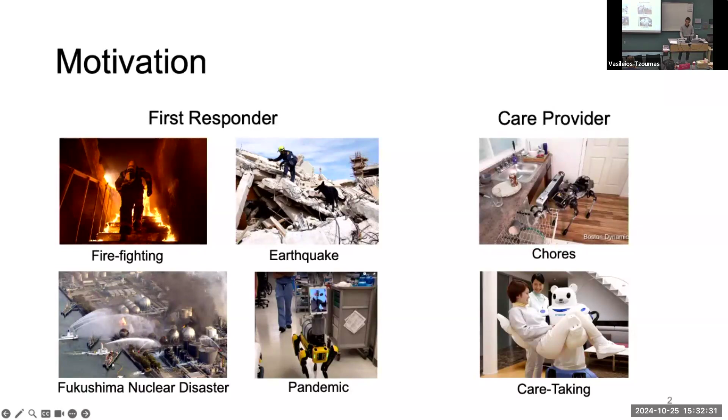Let's first take a look at search and rescue scenarios, where legged robots have a special capability to make discrete contact with the environment. In the first project I'm going to present, it's about jump planning over rough terrain. Imagine a collapsed building after an earthquake—if we can send in a legged robot that can make a sequence of jumps to overcome rough terrain, we can do search and rescue to identify survivors.

The planning problem has a couple of challenges. One is that the robot has to reason about discrete decisions, because the terrain presented to it is not smooth—it has multiple patches it can make contact with, so it has to reason about at which time to be in contact with which patch of terrain. The second challenge is that it has to do continuous time optimization, because the system undergoes very agile, highly dynamic motions. It has to explicitly reason about its capability limits as well as the complexity imposed by the environment.

So the first project is about jump motion planning in unstructured terrain, specifically using mixed integer convex optimization. The problem is set up as follows: our goal is to enable the robot to come up with a motion plan that leads it from the starting position to the goal region through a sequence of jumps.

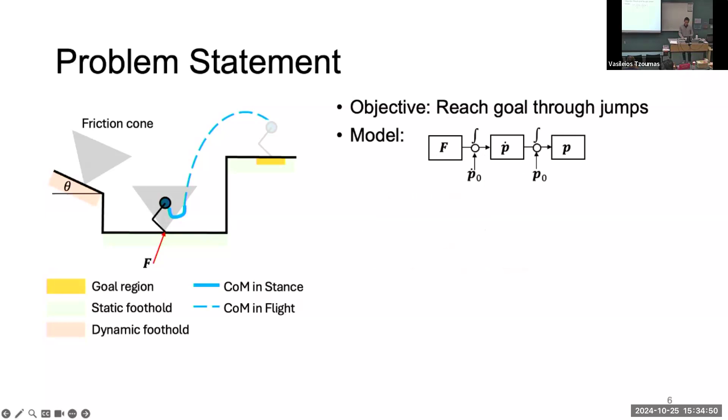Given a ground reaction force profile, we can integrate twice to obtain a trajectory of center of mass velocity as well as its position. However, the difficulty lies in its constraints. The first constraint, the friction cone constraint, is quite benign, because in order to ensure the foot does not slip with respect to the ground, the reaction force should lie within this cone.

But luckily, this constraint is linear in nature and doesn't break the convexity of the problem.

The problem comes in when we want to introduce the torque limit constraint. This is a non-convex constraint because even with the massless leg assumption, the torque equals the Jacobian transpose times the force, which is the ground reaction force.

And the Jacobian matrix involves sine and cosine functions and breaks the convexity. The second source of non-convexity comes from the bilinear constraints in the flight phase kinematics. If we take a look at the jump, the robot will undergo an aerial phase.

The takeoff velocity P dot TO and the aerial time T air are both decision variables, and this equality constraint is bilinear. And of course, even with the simplified terrain assumption, the choice of foothold is in nature discretized, so we have to introduce mixed integer constraints into the mix.

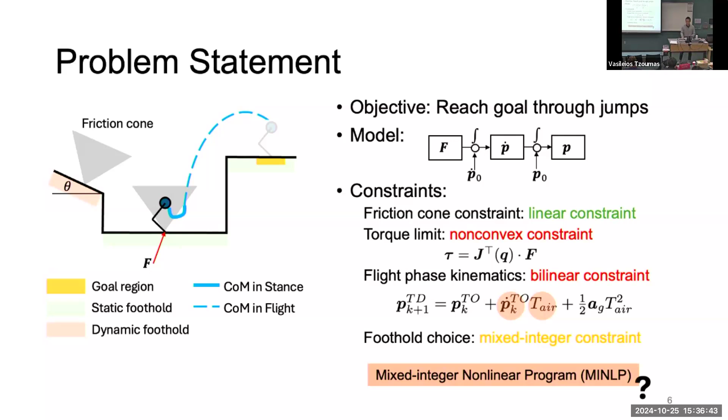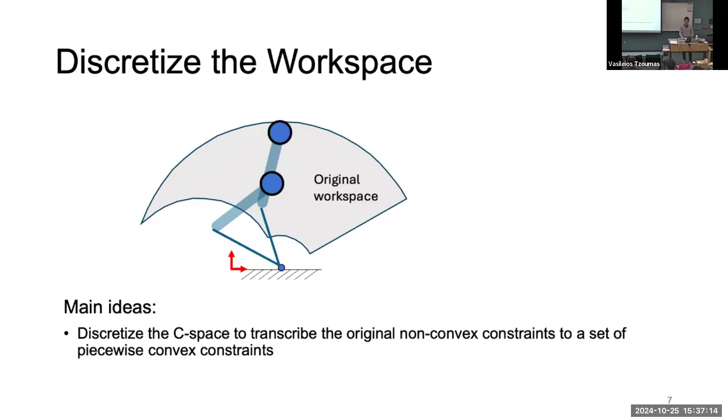So the main idea to make this MINLP convex is first starting with discretizing the workspace, or the configuration space of the robot, the C space. The reasoning is because the torque limit constraint is conditioned only on the pose of the robot. And if we can discretize the C space, then we can transcribe the original non-convex constraint into a set of mixed integer or piecewise convex constraints.

So the first thing we do is discretize the C space into a collection of convex polytopes. Then we introduce binary variables to act as switches to activate or deactivate the piecewise convex constraint associated with a specific polytope.

Specifically, we assign a binary variable indexed by S and T for each polytope omega S at time T, where if the binary variable B_ST takes the value of 1, that means at time T, the center of mass position P is in polytope omega S.

And whenever that happens, the associated convex constraint with that polytope will be activated, and all the other constraints will be deactivated. So B here is a binary variable.

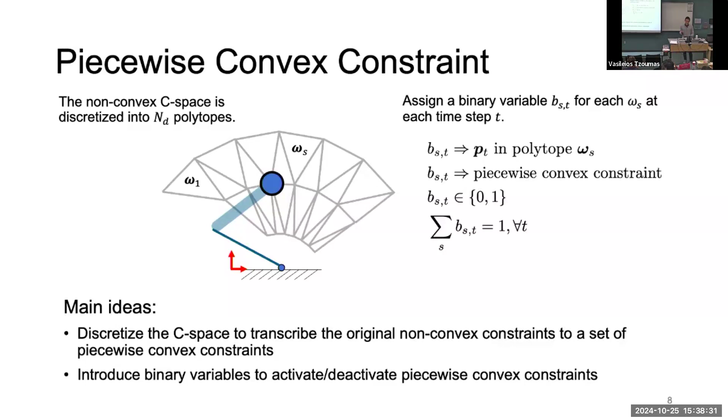And if we add the additional equality constraint where the summation of the binary variable along the axis of S is equal to exactly 1, then we can make sure that only one polytope is activated, meaning that at any given time T, the center of mass of the robot will occupy exactly one polytope.

So here, the implies operator, which is this right arrow, is implemented using the Big-M formulation.

All right, so this is the setup. We have discretized the workspace and introduced the binary variables in hoping that we can transcribe the MINLP into a mixed integer convex program.

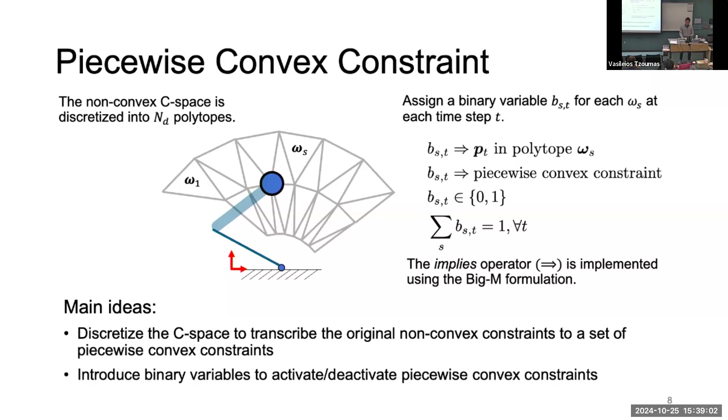So now, how can we obtain a convex relaxation of the non-convex constraint associated with torque for a specific polytope? Let's take a look at this torque limit constraint.

So for each polytope, the torque limit constraint can be written down as follows, where the 2-norm of the torque vector tau should be less than or equal to tau max, where the torque vector is a 2x1 vector with the hip and knee torque.

And the torque is the Jacobian matrix transpose times F, where F is the ground reaction force. And the joint angle Q can be calculated from the center of mass position via inverse kinematics.

So we can call this torque limit constraint star, and by plugging the third equation into the second and the second into the first, we can rewrite the torque limit constraint as follows: the 2-norm of J transpose F squared is less than tau max squared. And if we write it in quadratic form, the torque limit constraint is a quadratic inequality constraint.

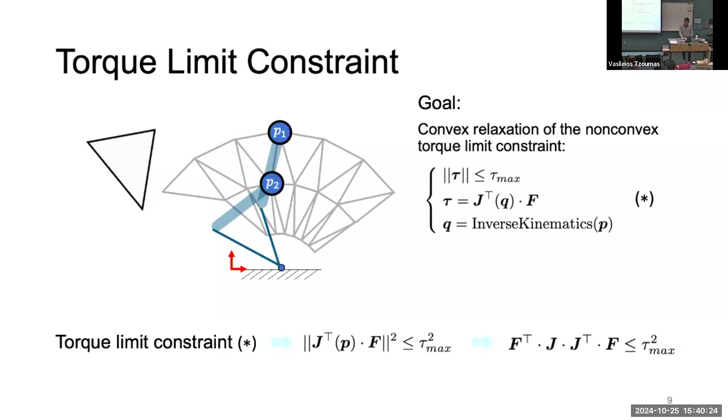So let's take a closer look at one specific polytope. Our goal is to obtain a convex relaxation of the non-convex torque limit constraint for all the points within this polytope. A very natural idea is that at least we need to satisfy this at the 3 vertices, right?

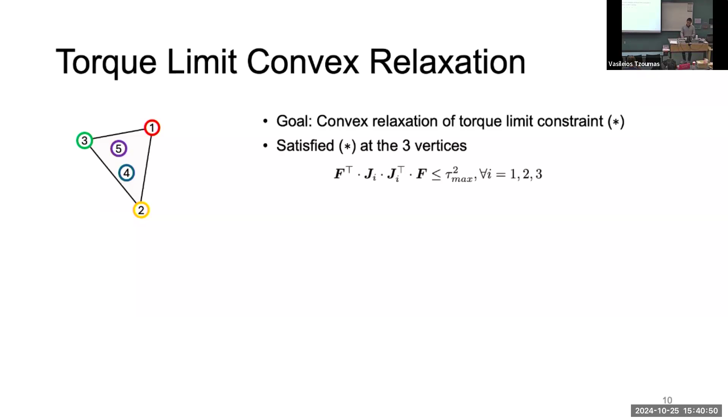So we can write down this set of 3 inequality constraints by plugging in the associated Jacobian matrix Ji into the inequality constraint. Here we observe that the matrix J times J transpose corresponds to an ellipsoid epsilon i in the joint torque space.

So if we draw the torque ellipsoids in the joint torque space, for each of the vertices we can see that we have 3 ellipsoids. And what this inequality constraint says is that all 3 ellipsoids should be lying within this circle with radius tau max.

So now the question is, how do we generalize from these 3 vertices into all points within this polytope? Because if this is a finite sample, how do we make sure that we can satisfy this constraint for all the points? One idea is to simply take more samples within this polytope, so we can take points 4, 5, and so on, and add them to the list, but it's not exhaustive, right?

So how do we make sure that we generalize? We propose to use a convex relaxation where we impose the torque limit constraint on the minimum volume ellipsoid that covers the union of ellipsoids. So if we can find an ellipsoid that covers all sampled ellipsoids, and instead of imposing on each sampled ellipsoid we impose the torque limit on this overestimation of ellipsoids, then we can make sure that the torque limit constraint is guaranteed within this polytope.

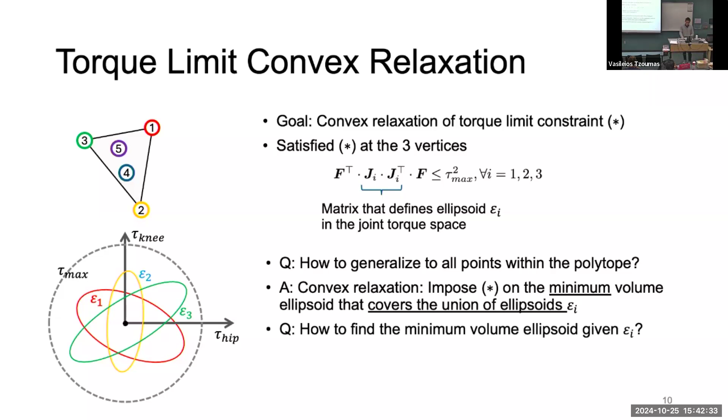So now the question becomes how to find the minimum volume ellipsoid given the set of sampled ellipsoids. It turns out we can use the Löwner-John ellipsoid, which can be obtained by solving a semi-definite program, or SDP.

So in this SDP, the decision variable is X, a 2x2 symmetric positive definite matrix corresponding to the ellipsoid of interest, which is the blue ellipsoid on the lower left corner. We want the minimum volume of this ellipsoid, so we want to minimize the trace of this matrix, and then we want the ellipsoid to cover all the sampled ellipsoids.

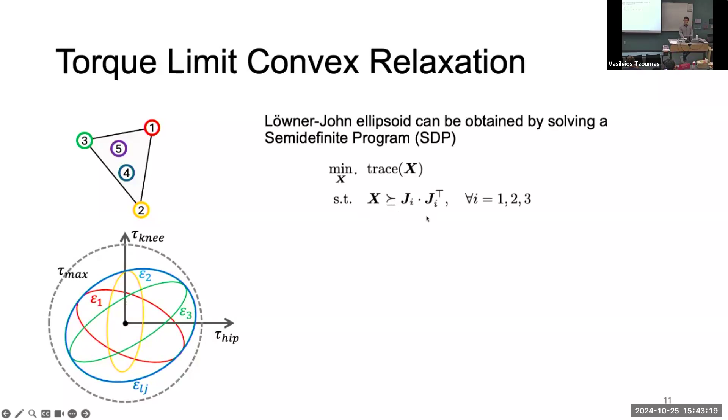So we need to make sure that X is greater than or equal to Ji times Ji transpose for all the sampled ellipsoids. This SDP can be solved using solvers, and each Jacobian is the Jacobian matrix at the vertex points.

So we can solve the SDP to obtain the X matrices. And instead of imposing the torque limit on the sampled points, we impose it on this overestimation of the torque mapping. At this point, we have transcribed the original non-convex constraint into a mixed integer quadratic constraint. Any questions up to this point?

This Löwner-John ellipsoid semi-definite program only involves the torque ellipsoid at the 3 vertices, right? Yes. And you know that all the other ellipsoids are within it.

Yeah, so this is a very good point. It depends on whether this assumption holds, which depends on how you discretize the space. We know that binary variables are quite expensive, so we want to minimize the number of sections, but we want to make sure the sections are small enough that this holds. So it's like a trial and error process to figure out what the hyperparameter is.

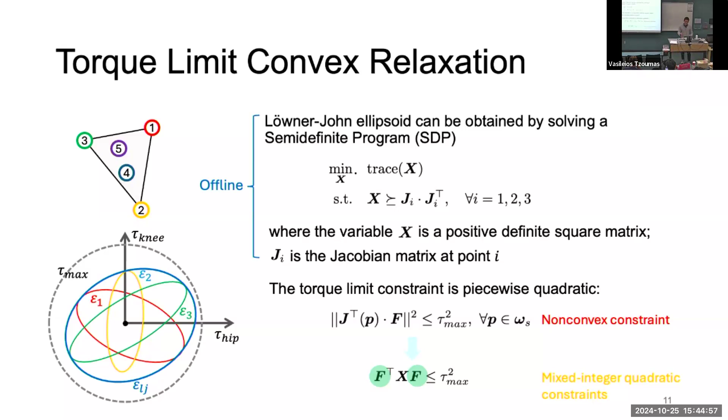Okay, so solving this SDP is computationally expensive, but the good news is that it can be done offline. So we can construct this C-space discretization, solve a bunch of SDPs for each ellipsoid, and then retrieve those X matrices online for the planning.

Okay, at this point we have a convex friction cone constraint, and we have transcribed the originally non-convex torque limit constraint into mixed integer convex constraints. So another source of non-convexity comes from the bilinear constraints in the flight phase kinematics.

And the flight phase kinematics is bilinear, and the way we deal with it is to introduce a McCormick envelope approximation. So the graph on the lower left-hand side is the surface corresponding to the product of takeoff velocity P dot TO times the air time T air.

This is a non-convex constraint, as you can see, and the way we tackle this is that we discretize the surface into a finite set of convex polytopes and introduce additional binary variables to activate and deactivate the constraints.

So this looks a little bit like it transcribes this original surface constraint into a bubble wrap. Each of the segments corresponds to a pouch, and the bilinear product will be lying within one of the pouches at any given time, right?

For the foothold choice constraint, we introduce additional binary variables because we model the terrain as piecewise affine functions, and at each jump, we allow the solver to decide which segment of terrain to choose.

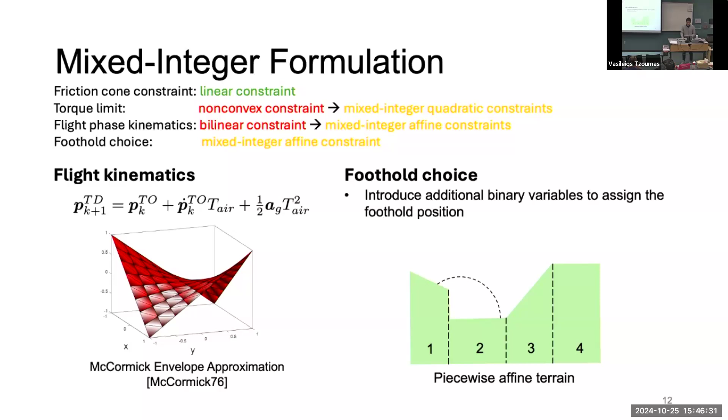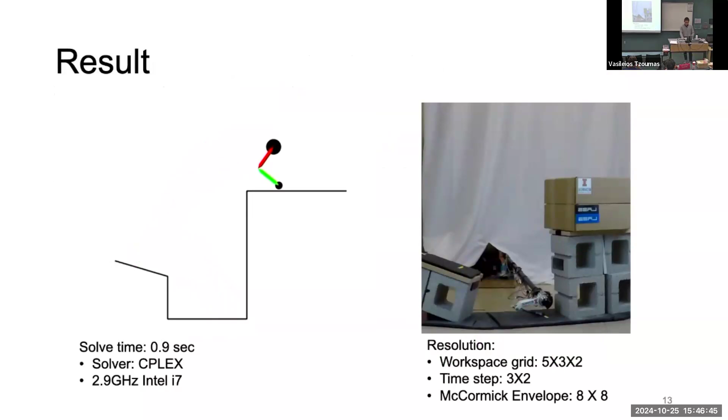At this point, we have formulated the original mixed integer nonlinear program into a mixed integer convex program, MICP. This problem can be solved for this particular setup where the robot is commanded to jump from the starting point to the goal, which is on the high platform.

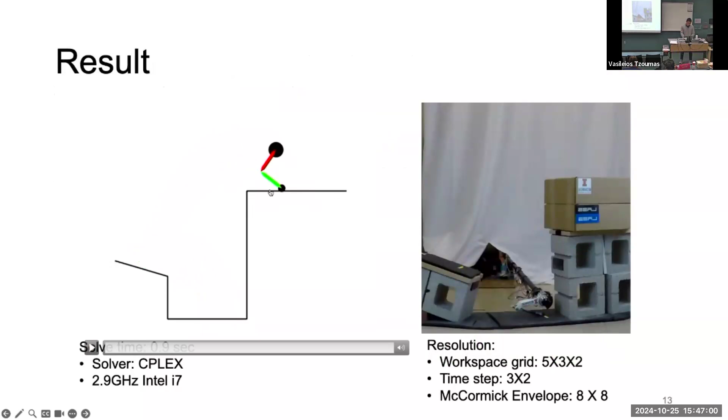The robot doesn't have the high enough torque to directly jump from the starting point to the goal region. So we introduce an additional terrain feature on the left-hand side, hoping that it will figure out the strategy to utilize the terrain on the left-hand side to reach the goal region.

It turns out that this MICP formulation is able to be solved within 1 second using CPLEX a few years ago to figure out the solution by itself. We do not supply any additional initial guesses or warm start, so the program is able to figure it out on its own.

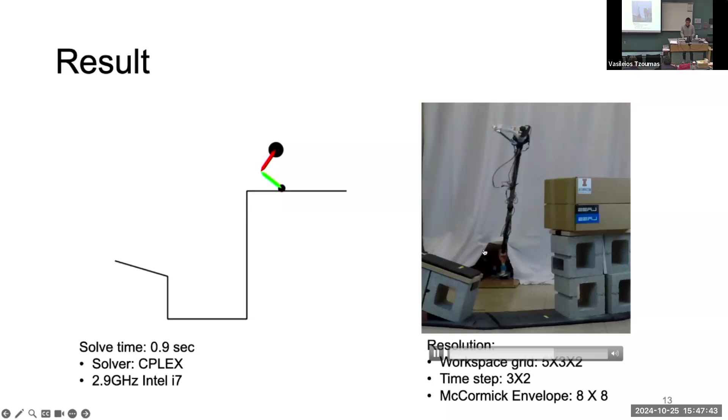By integrating with a hardware system we developed, we have replicated this behavior in experiment. Here we have a boom system to kind of planarize the motion of the robot, and a good enough low-level torque control to execute the motion.

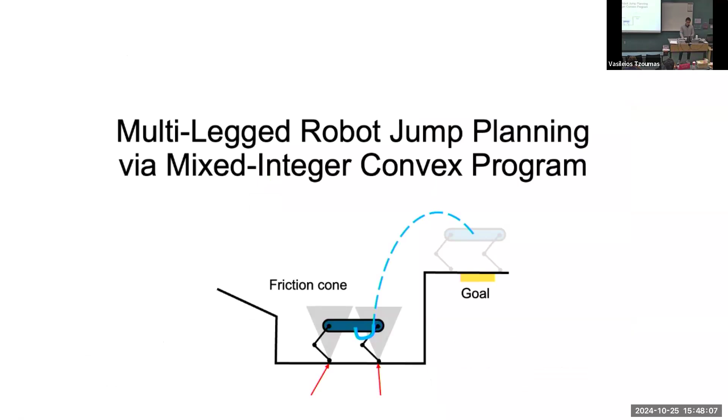So now we can plan this sequence of jumps for a single-leg robot. A natural question is whether we can extend this for a multi-legged robot, and it turns out we can. The difference between a single-leg robot and this two-leg robot is that we have more contact foot capabilities.

So we introduced the notion of feasible wrench polytope, which is the intersection of the contact wrench cone—the friction cone as we introduced before—as well as the actuation wrench polytope, AWP, which is the mapping from the torque limit in joint space into the workspace. The FWP is the intersection of these two polytopes, representing the actuator and environment constraints in one polytope.

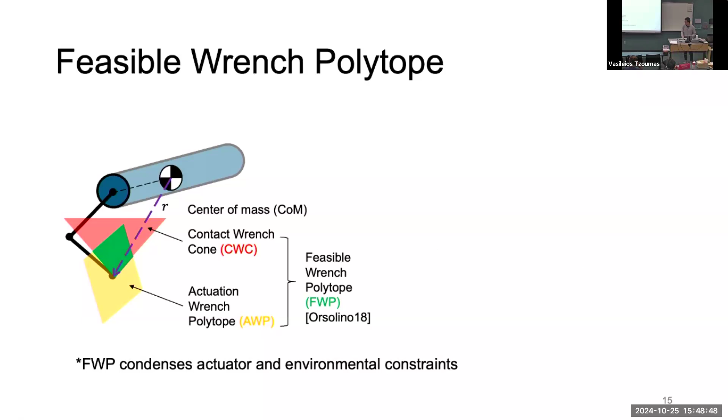A formal definition of FWP has two components: one is the linear force, and the second is the moment about the center of mass. For one FWP, it's relatively easy to represent, but if both feet are in contact with the ground, then the FWP of two legs is the Minkowski sum of the two FWPs corresponding to the contact feet.

Here's a visualization of what that looks like. The blue polytope represents the FWP associated with the front leg, and the red corresponds to the FWP associated with the back leg. If we plot it in wrench space—Fx, Fz, and tau y—we can see that the FWP of each foot is slanted, because the front foot can produce wrench only in a subspace of the wrench space.

However, if we sum up these two FWPs to get the FWP of the two legs, we can see it's a convex three-dimensional polytope.

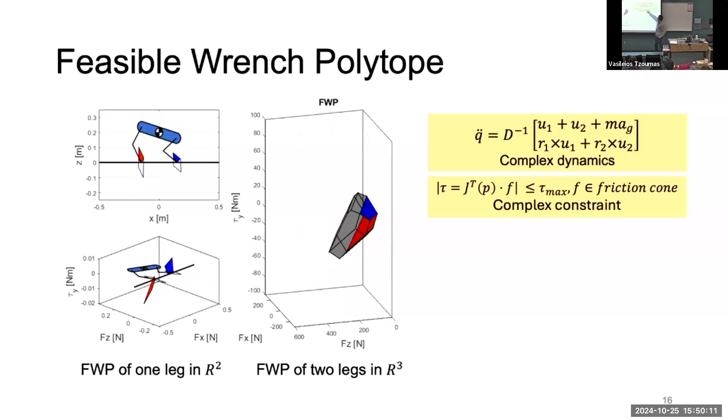The reason why we want to optimize within this FWP space is because originally we have relatively complex dynamics—complexity coming from this cross product, R cross U, where R is the vector from the center of mass to the contact position, and U is the ground reaction force.

In addition, we also have complex constraints, including the torque limit constraint as well as the friction cone constraint. By introducing this FWP, we can transcribe the original problem into simple linear dynamics, because now our optimization variable becomes the wrench around the center of mass, and we move the complexity into the FWP construction.

The reason why that is beneficial is that in mixed integer programs, it's the introduction of additional binary variables that's expensive—it doesn't scale well in the dimension of binary variables. But the complexity of the constraint associated with a binary variable doesn't scale badly. So we want to pack as much complexity into one binary variable as possible. That's the main idea.

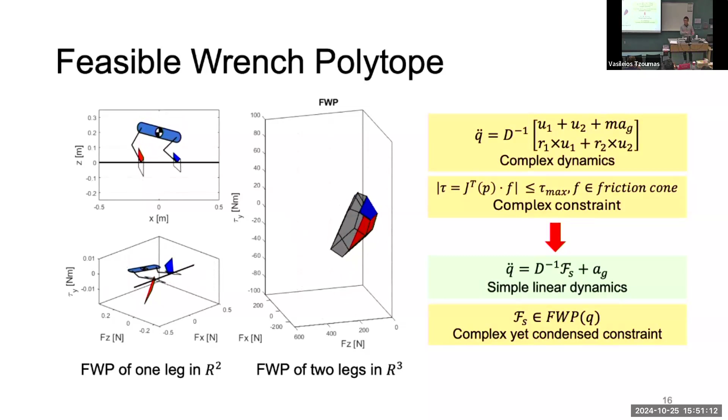So what does the C space of the robot look like? It looks like this. It has three sections, each corresponding to one contact condition. The red one is when the robot only has the back foot in contact with the ground. The blue one is the front foot, and the black region corresponds to double stance.

As before, we discretize this C space into a finite number of tetrahedrons. Then we introduce a binary variable BST for each configuration Q, which is the center of mass position and pitch angle. Whenever a binary variable equals 1, it means the configuration of the robot lies within this tetrahedron omega s, and the associated wrench constraint is activated.

As before, we have this summation-to-one constraint to ensure the configuration of the robot lies within only one tetrahedron at a time. And similar to before, the implies operator is implemented using a big M formulation.

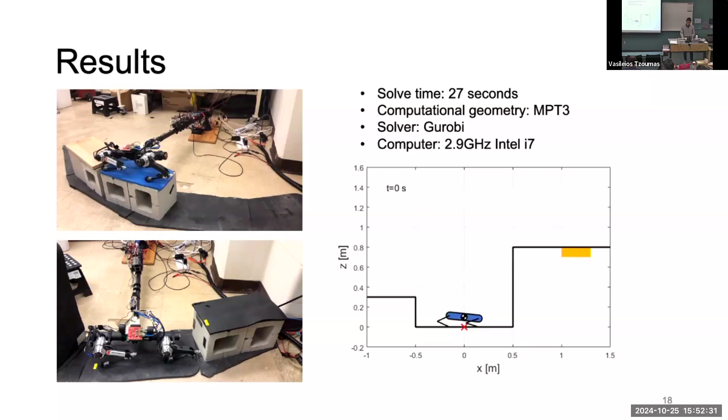Here are some videos showing the execution of these motion plans. The robot can jump forward onto a plane, jump backward onto a plane, as well as figure out this relatively complex parkour motion using about 27 seconds. It's relatively complex because it's reasoning about the terrain choice as well as the contact sequence at the same time.

Okay, so here concludes the first part of the presentation, which is about motion planning for jumping robots. Any questions?

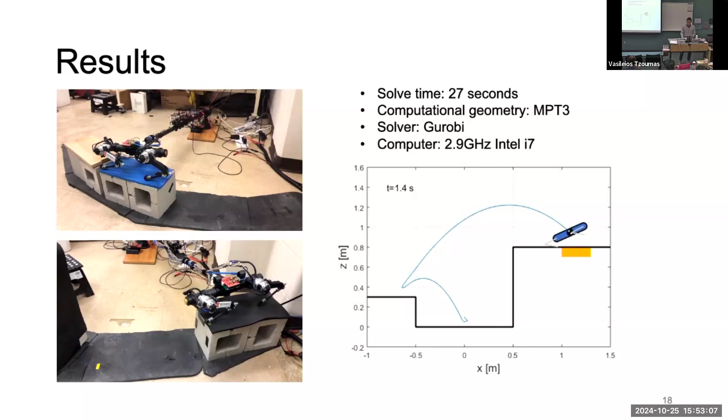All right, so next I'm going to talk about optimization-based control for dynamic legged robots. So we have those motions—how can we control them? The method we use here is optimization-based control.

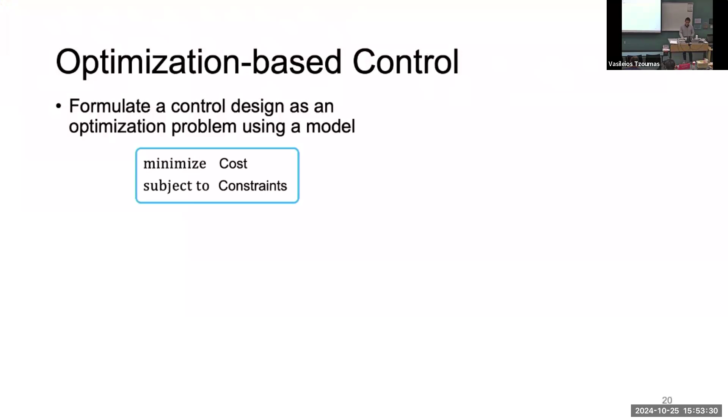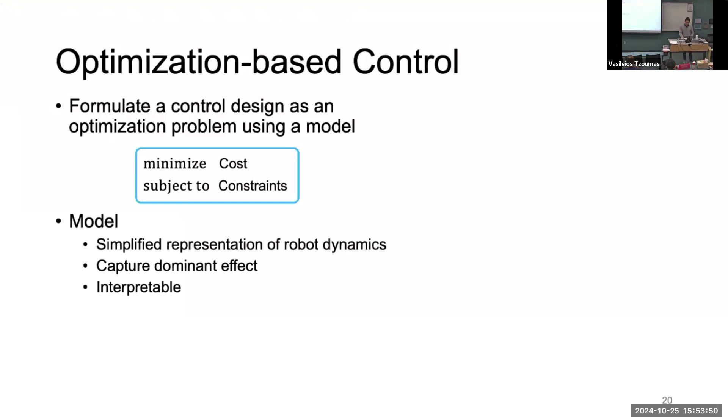The main idea is that we formulate a control design problem as an optimization problem based on a model of choice. We want to minimize a cost subject to constraints, where the constraint is conditioned on the model we choose. For legged robots, because of their high dimensionality and hybrid nature, we usually choose a simplified model to capture the dominant dynamic effects of the robot. An additional benefit is that the model is interpretable.

For example, for a quadruped robot, we often model it as a single rigid body. You can think of it as a floating potato with contact forces that juggle it. Contact forces are activated whenever the foot is in contact with the ground.

So all models are wrong, but some are useful. In this case, this single rigid body model is quite useful.

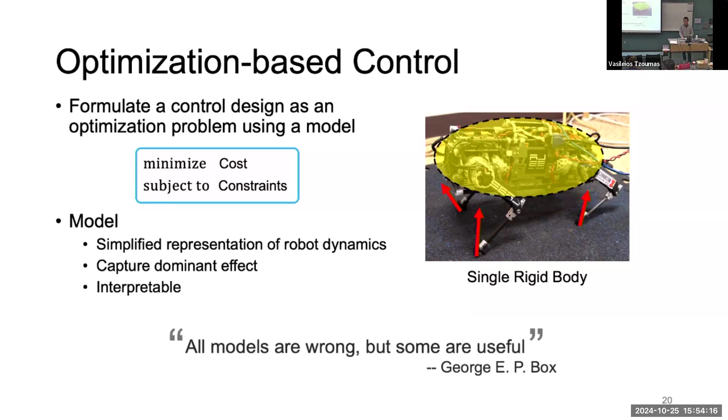So the formulation of MPC, or model predictive control, is as follows. At each moment of time, we measure the current state of the robot X, and then based on this measurement, we formulate an optimization problem.

For example, we can formulate a quadratic program where we penalize the state tracking error and control effort, subject to linear constraints that encode the dynamics, which come from the model, as well as inequality constraints imposed by the environment, for example friction cone constraints.

The output of this optimization is a sequence of action predictions as well as state predictions into the future within a horizon. We only apply the first optimal input during the current time t and the next time tick. Until the next time comes, we do this whole thing again.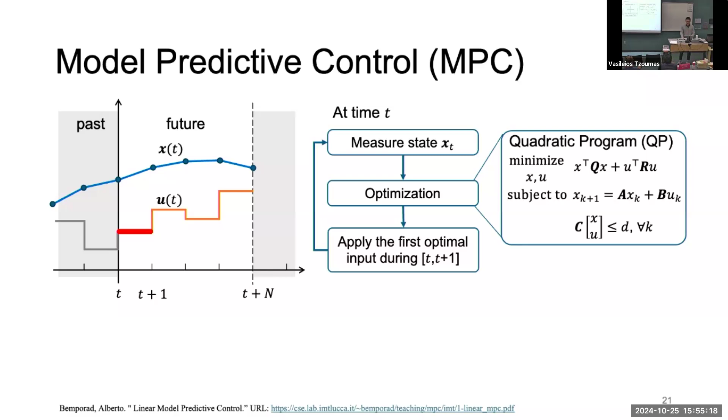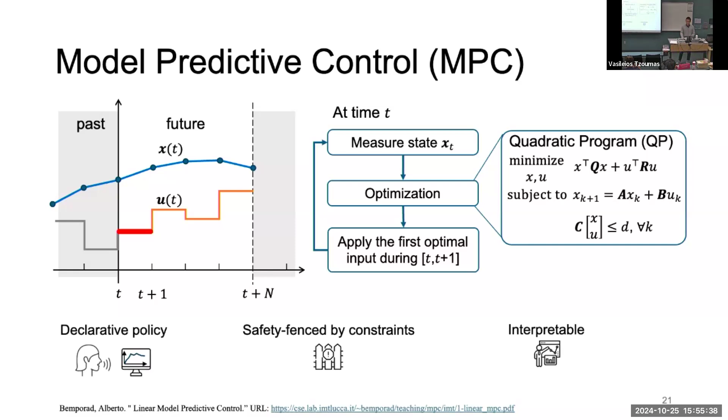You can think of this MPC formulation as a linear quadratic regulator, or LQR, with inequality constraints. The benefits of MPC are that it's a declarative policy, meaning you can articulate what you want and impose it as constraints. It's also safety-fenced by the inequality constraints, and because it's based on the model, it inherits the interpretability from the model.

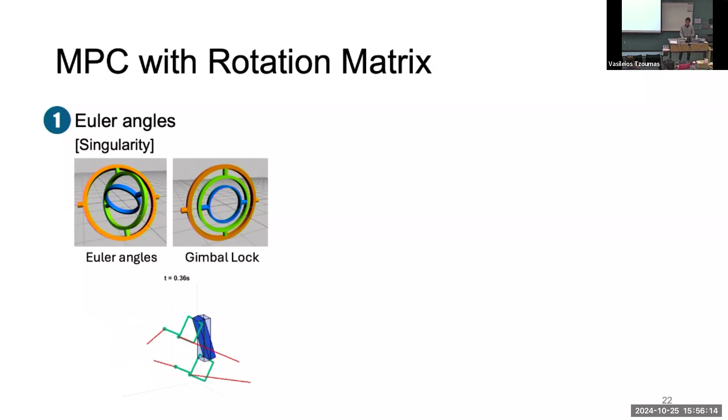Traditionally, MPC for quadruped robots uses Euler angles to represent orientation. But Euler angles have the trouble of singularity, because whenever the two rotational axes of the Euler angle are collinear, we lose a degree of freedom, which corresponds to gimbal lock, or singularity of the matrix. What that means numerically is that whenever the robot's pitch angle is close to plus or minus 90 degrees, the MPC will experience numeric instability.

There's also quaternions that can be used to parameterize the orientation of the robot, but they have the double-covering issue, meaning that for each orientation there are two distinct quaternions, which can be problematic if you want the robot to execute motions with large angular excursions.

So we propose an MPC formulation that directly works on rotation matrix instead of Euler angle or quaternion. By doing so, we can unlock new behaviors without additional computational requirements. And here we see a controlled backflip.

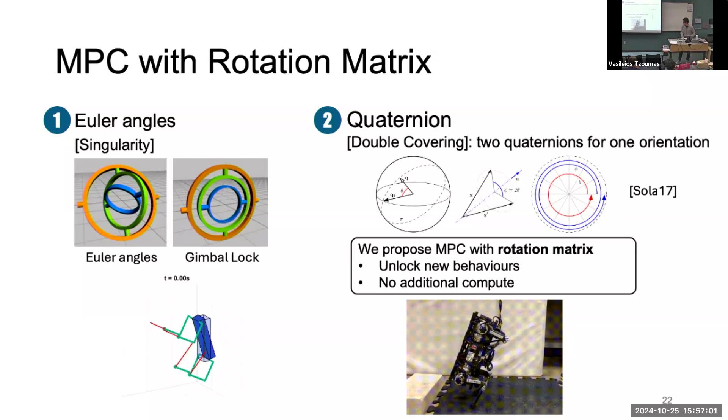The way that we do MPC with rotation matrix is that we linearize the original nonlinear rotational dynamics, R dot equal to R times omega hat, taking the first order Taylor expansion of the matrix exponential map. Imagine that the rotation matrix R lives on the SO3 manifold. At each time t, we measure the current orientation RT, take the tangent plane around it, and predict on that tangent plane.

Because the variables RT and delta RK are 3x3 matrices, we need to vectorize them to fit into the MPC formulation. Once we've done so, we use a forward Euler integration scheme to obtain our discrete time linear dynamics. So up to this point, we have linearized the nonlinear rotational dynamics.

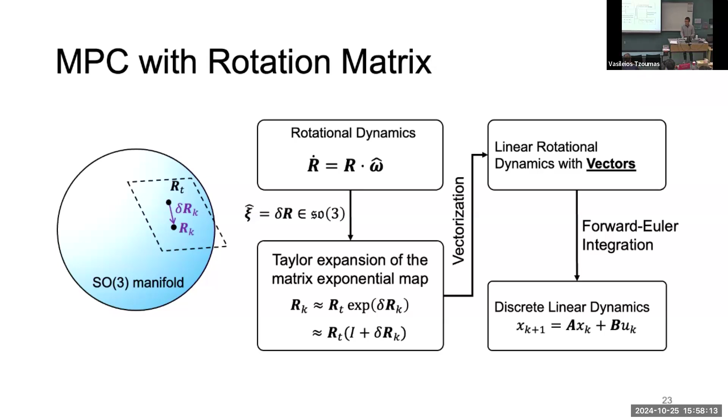Another piece of the puzzle is the objective function. The original orientation error function involves the matrix logarithm map. RD is our desired orientation we want to track, RT is our current orientation, and RK is our predicted orientation K steps into the future. ER is the geodesic between RD and RK, and this involves the matrix logarithm function, which is nonlinear.

But we want a linear expression for the orientation error. The way that we approximate ER is to decompose it into two parts: the first is the geodesic between RD and the current orientation RT, and the second is the linear approximation delta RK. By doing so, we obtain a linear expression for the orientation error, and the orientation cost consequently becomes quadratic.

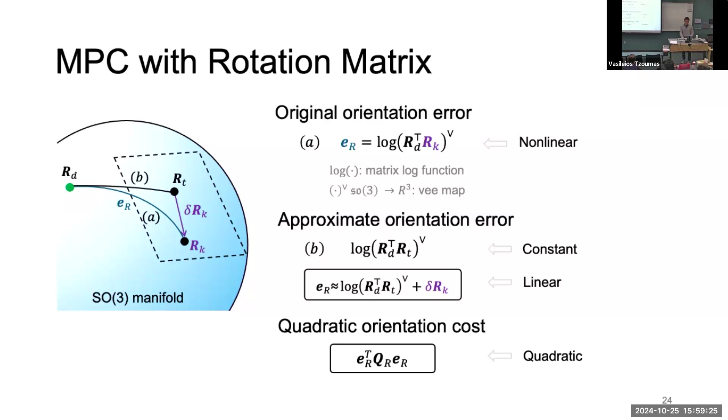So we have a linearized dynamics and a quadratic cost function. At this point, we can formulate the MPC problem as a quadratic program. And even if this MPC problem is high dimensional, we can exploit the sparsity of this problem.

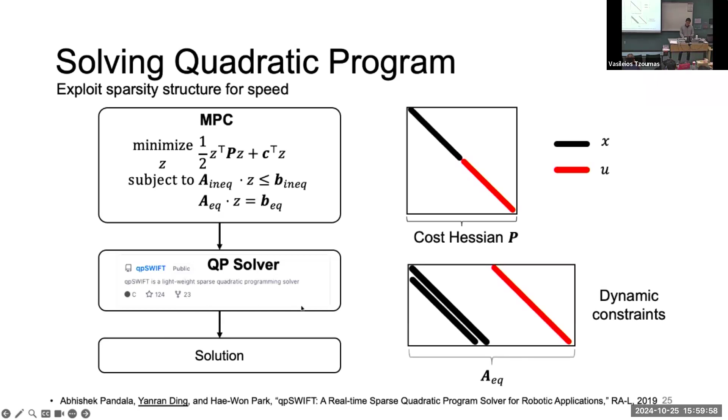In this case, the Hessian matrix of the cost is a diagonal matrix, and the Jacobian matrix of the equality constraint is block diagonal and block tridiagonal. We can exploit this sparsity pattern in our custom QP solver called qpSWIFT to solve the MPC problem at 200 Hertz and above.

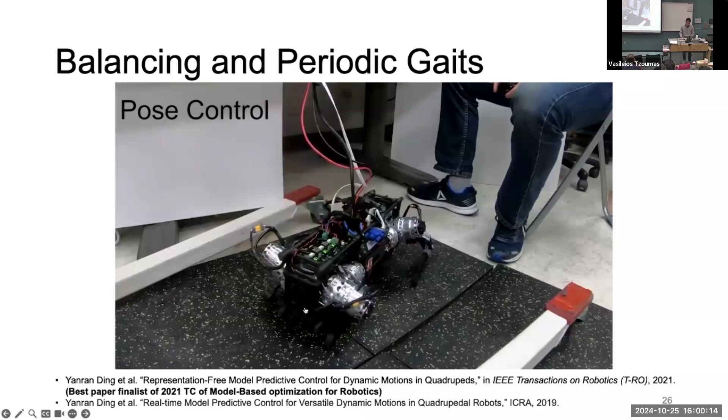Using this MPC, we can perform a variety of quadruped behaviors such as pose control, trotting, and so on. This video was published in 2021, which looks really vintage at this point, and this shows the rapid advancement of the field.

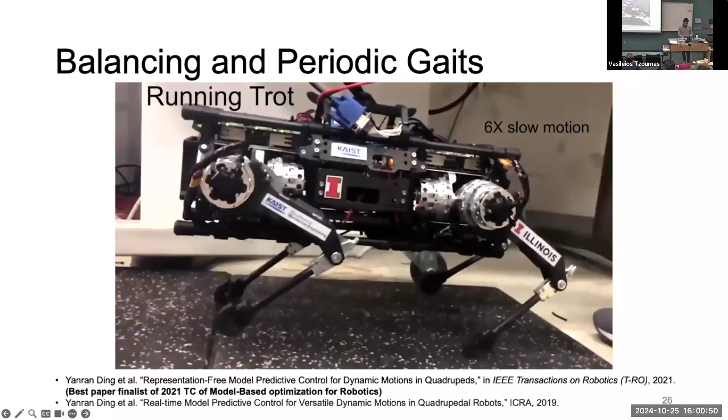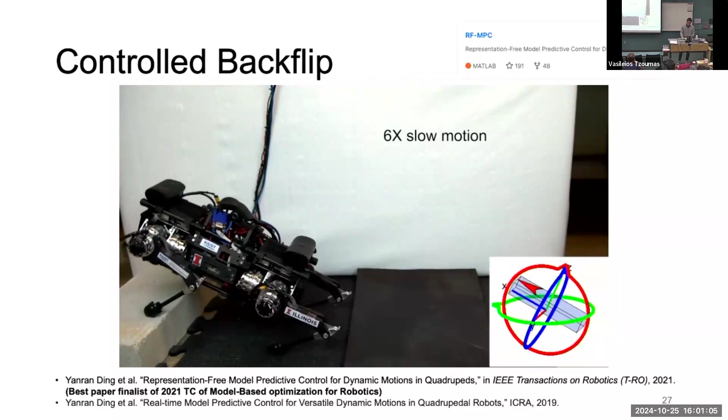A special feat enabled by the MPC using rotation matrix is a controlled backflip. In this controlled backflip, the robot has to go through the singular pose corresponding to the pitch angle equal to 90 degrees. As you can see in this video on the lower right side, the Euler angle representation will experience a sudden jump that would destabilize the MPC using Euler angle, but because we're using rotation matrix, it doesn't get affected.

And we have open sourced the code, RFMPC, on GitHub.

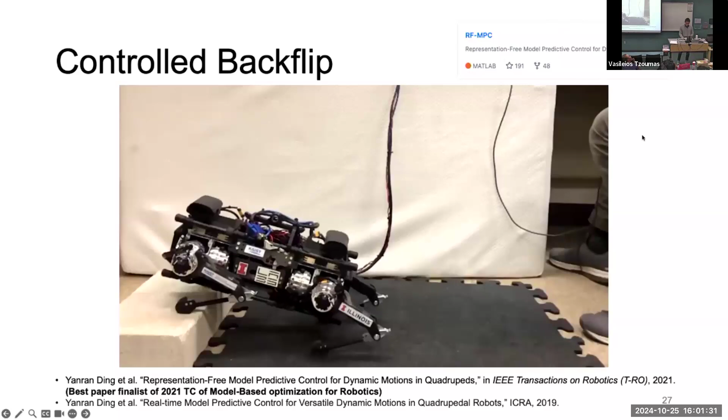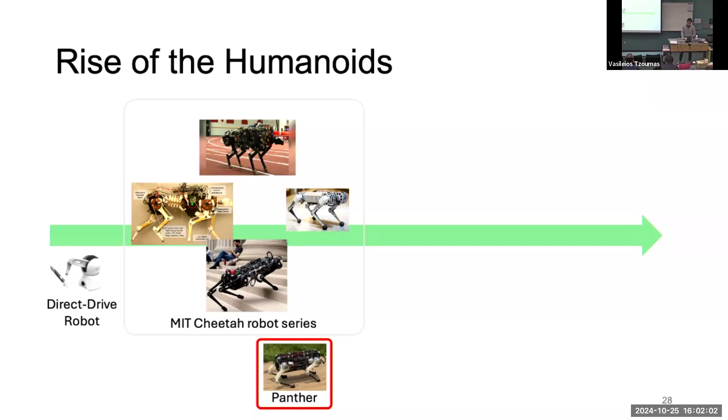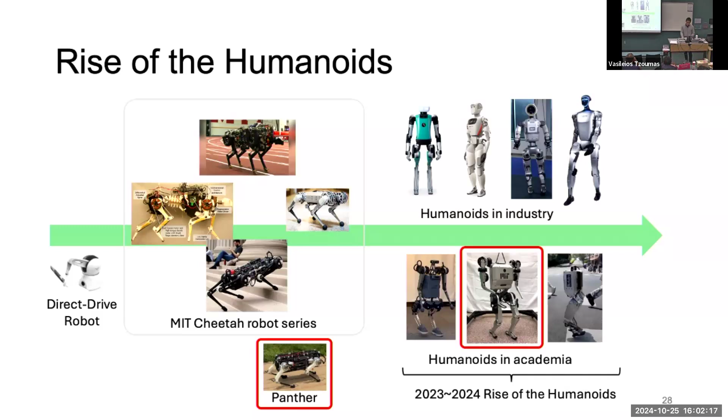So these are the MPC work that I've done with the quadruped robot. We can see that in the past years, there's been a lot of advancement in the field, especially in quadruped robots, exemplified by the MIT Cheetah robot series. The robot I work with, Panther, came out about the same time as the mini cheetah. After that, especially starting from the end of 2022, we have seen a rise of humanoids, with many companies and research labs coming up with their own humanoid. So the next portion of this presentation, I'll talk a little bit about my experience with humanoid control on the MIT Humanoid.

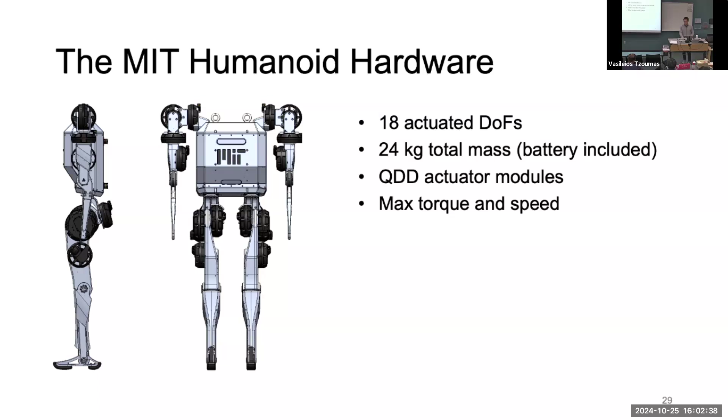The MIT Humanoid hardware is quite magnificent in the sense that it has 18 degrees of freedom. Each leg has 5 degrees of freedom, and the arm has 4 degrees of freedom. The total mass is 24 kilograms. Each joint uses a so-called quasi-direct drive actuator module, and its max torque is quite impressive, especially the knee, which can reach up to 140 Newton meters. This is impressive because the reduction ratio is only 6:1 for each joint.

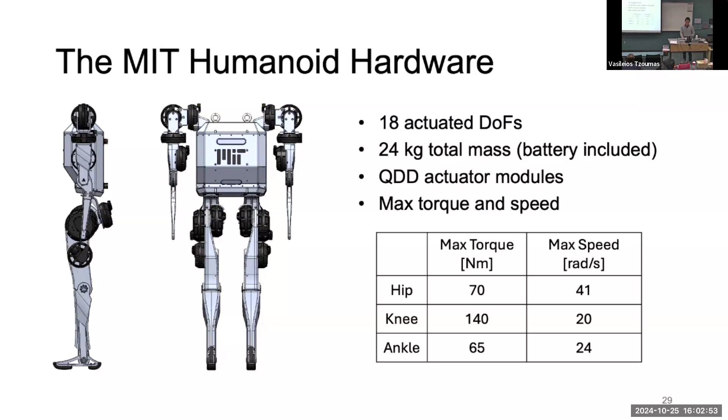The difference between humanoid and quadruped is that for humanoid, footstep location selection is much more important. A quadruped robot has 4 feet and relatively high stepping frequency, but humanoid only has 2 feet and relatively lower stepping frequency. So choosing where to step is much more important.

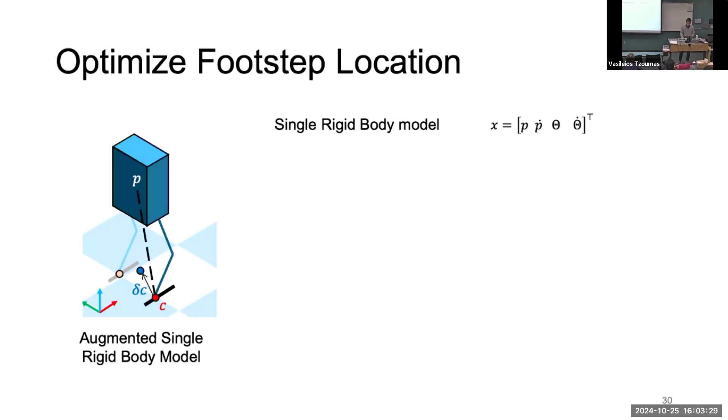In addition to the previous single rigid body model used for quadruped control, I introduced the augmented single rigid body model, where I added the footstep location as part of the state vector. The benefit is that now we can reason about the torso orientation and the stepping strategy simultaneously.

Specifically, we add an additional term into the linear dynamics, where the A matrix is nothing but a Jacobian of the dynamics with respect to the state, where the state includes the single rigid body state X and footstep location C.

The last 3 columns of this A matrix, called AC, characterize how a change in the step location C will affect the dynamics. We add this AC matrix as an additional term into the linear dynamics.

Here, eta is a binary vector that encodes the gait sequence, the gait schedule, to turn on and off the capability to take a step. And delta C here is the stepping vector, which is part of the optimization variable.

By introducing delta C as part of the MPC variables, we can simultaneously get the ground reaction force as well as the footstep policy.

A major advantage of using MPC compared with other control methods based on inverted pendulum is its capability to impose kinematic constraints and also reason about terrain features.

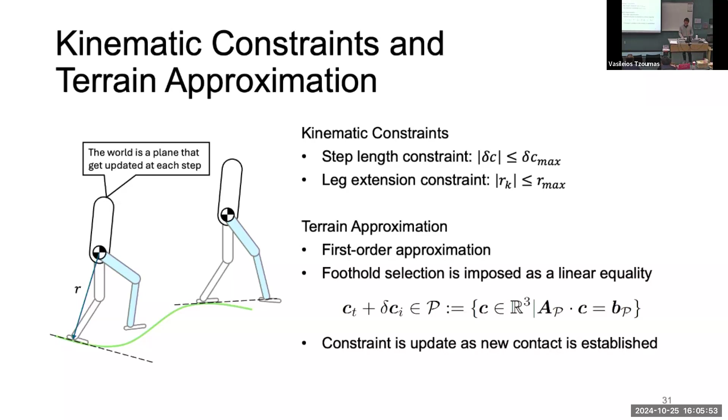In addition to the MPC, we also need a whole body controller that reasons about the full dynamics of the robot. The whole body controller has 3 components.

The first component leverages the foresight from MPC, because whole body control is a myopic controller. Even though it can reason about the full dynamics, it doesn't have a notion of horizon. So MPC will inform long horizon reasoning into the whole body control by introducing a tracking cost in the whole body control.

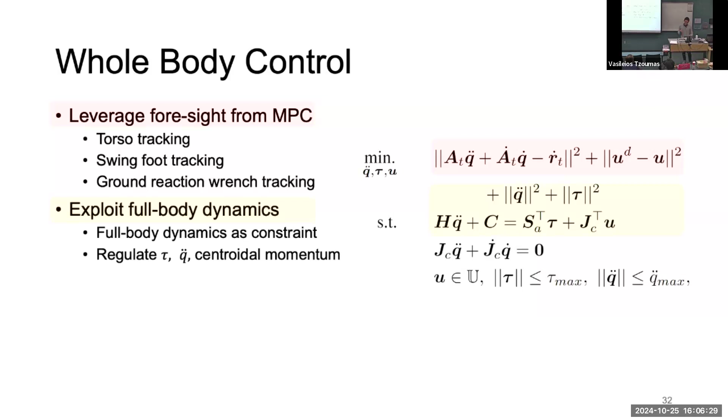The second component is the capability to explicitly reason about full body dynamics, manifesting itself as the manipulator equation, as you can see here.

The third part respects physical constraints. Here, JC is the Jacobian for the contact points. Whenever a contact is happening, its acceleration should be 0, and also the torque limit, as well as friction cone constraint, and so on.

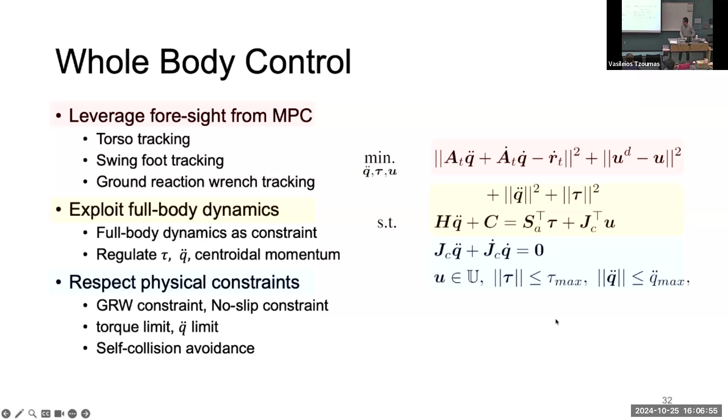One key contribution of this work is to introduce self-collision avoidance using control barrier function. Robots, especially powerful robots like MIT Humanoid, we don't want them to slam into themselves because it can damage the robot and take a long time to repair.

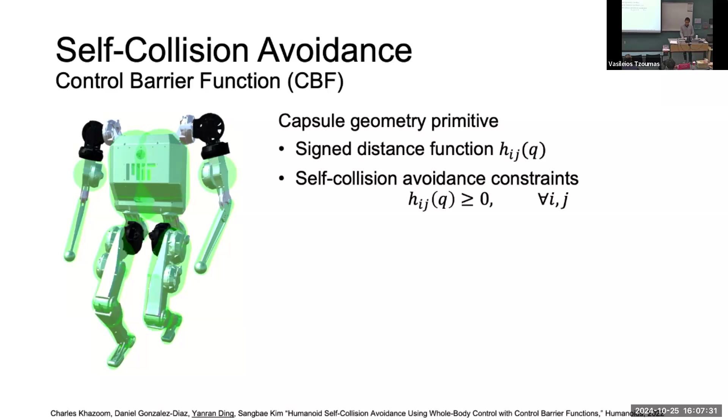In order to avoid self-collision, we cover the robot first with capsule geometric primitives. Then for each pair of capsules, we write down the signed distance function, Hij. The self-collision avoidance constraint becomes that Hij should always be greater than or equal to 0 at all times.

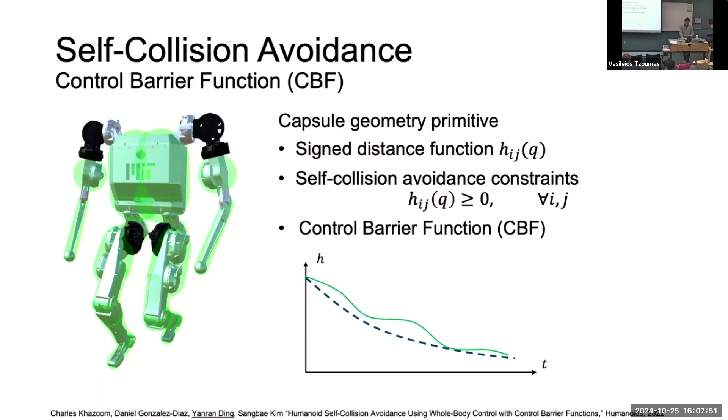The control barrier function ensures that the pair of capsule geometric primitives does not collide into each other, and by imposing this as an additional inequality constraint in the whole body control, we can avoid self-collision.

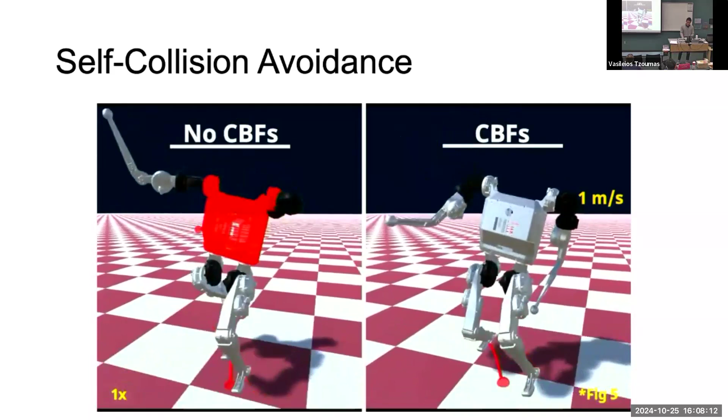On the left-hand side, without the control barrier functions, the robot will collide into itself, and the corresponding part will be highlighted in red. On the right-hand side, with the CBF-based collision avoidance, the robot does not slam into itself. Then we put the robot on a wave field.

The blue dot is the footstep prediction based on the local terrain approximation, and the red line is the ground reaction force.

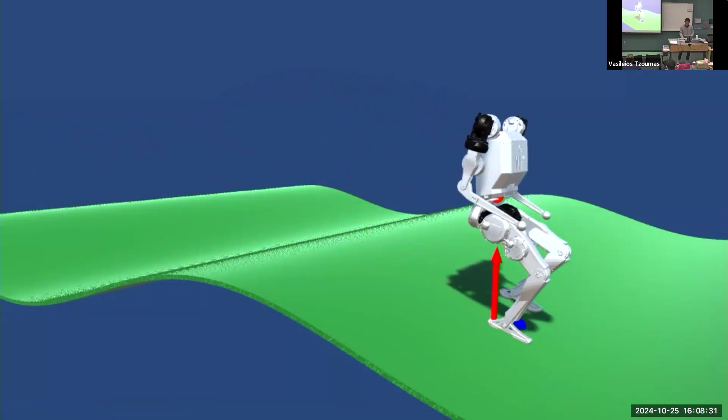Finally, we put the controller onto the physical robot, and it starts to take steps.

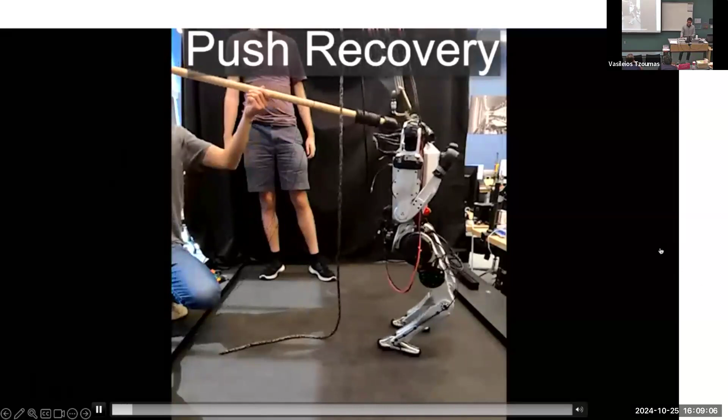This controller is also robust to some external pushes.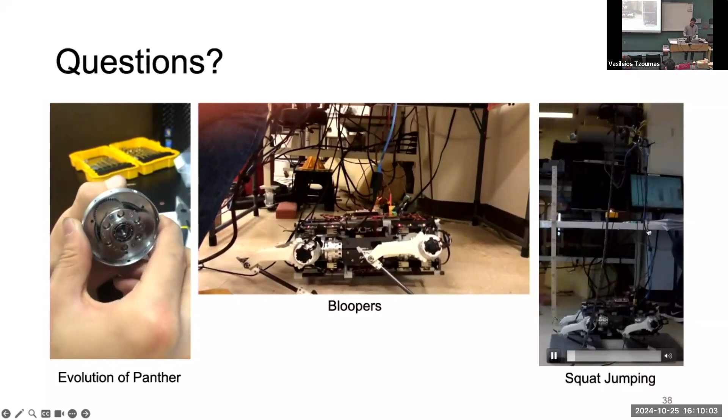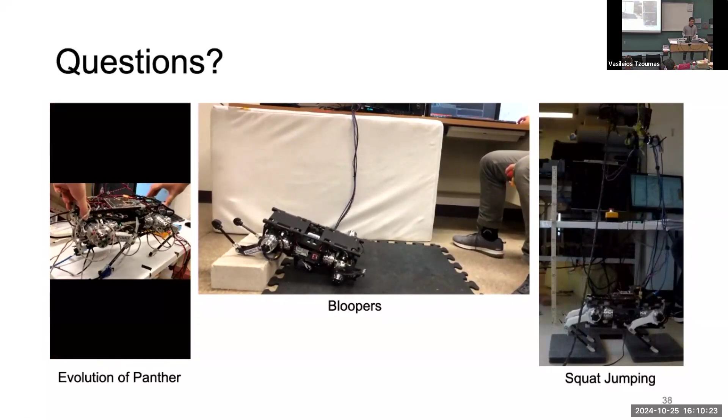Yeah, so in this particular work, we do not project it back into the SO3 manifold, but we do have a discounting factor. So the further away you are in your prediction horizon, the less you trust the orientation prediction. That was going to be my next question, was whether this limits your horizon.

Yeah, I think so. There's some subsequent work following this where it's utilizing a nonlinear MPC formulation. So instead of solving a QP with a linear time invariant dynamic system, it solves an LTV system. Basically, it takes the previous trajectory prediction as your reference and then linearizes around that. That will mitigate to some extent the SO3 prediction errors, but in any case, it's leaving the SO3 manifold anyway.

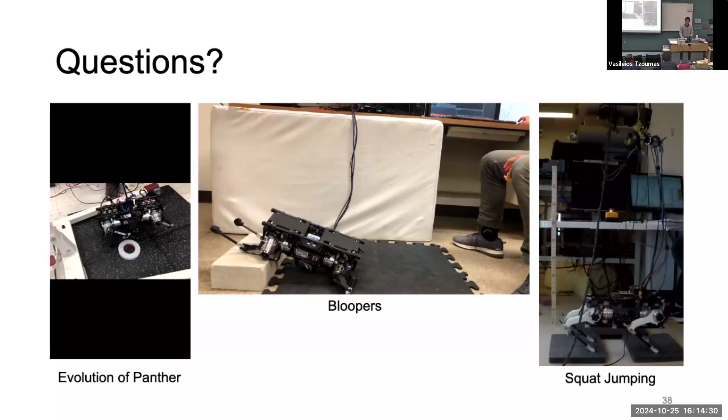Well, that's a very packed question, so let me try to decompose it a little bit. The quality or merit of the model depends on the system. For a quadruped, single rigid body is a really good model because really all the actuators or the major masses are in the torso, so it's a really good approximation. But this assumption starts to break down if you look at a humanoid robot, because the humanoid has relatively heavier limbs. So in this case, single rigid body no longer serves the MPC well.

So we see some need to introduce whole body control. For a quadruped, it can work without whole body control at all. But for a humanoid, you kind of have to have a really reliable inverse dynamics controller. So the rise of data-driven methods, definitely I can see it has huge value. One of my research directions is to attempt to incorporate data-driven methods with model-based control. But I'm not sure specifically where that is best utilized. We are still in an exploring phase.

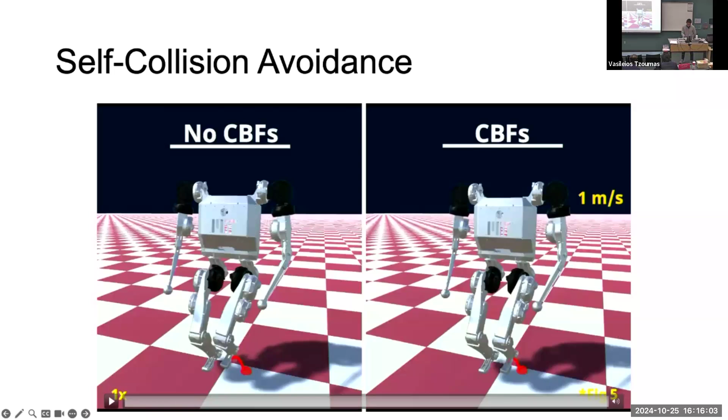That's a really good point. Looking back, the planning work is from quite a few years back, so I can see a lot of things that can be improved. At that time I was not aware, I was oblivious to neural networks. So I would like to explore the possibility of introducing learning-based methods into these planning problems. Thank you.

In the beginning you talked about how you're approximating it as a point mass rather than a leg, with most of the mass centered at the torso. Did you do that as well in the humanoid modeling, and when does that sort of break?

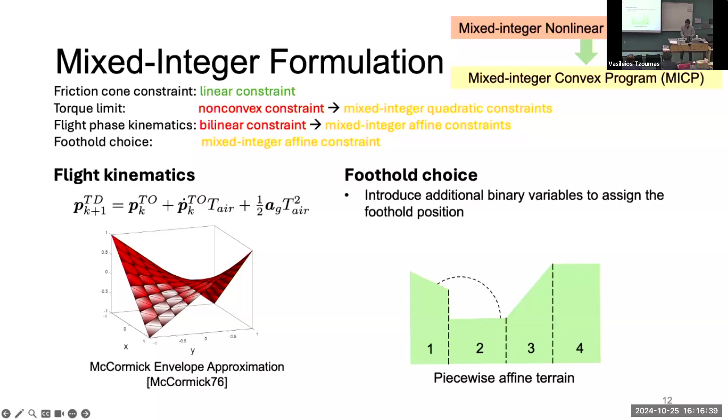For the humanoid modeling we're using a single rigid body model. You can think of it as a rigid box floating in space, and the control effort is the wrench applied from the contact foot. In this case we have a line contact, so we can apply pitch torque, yaw torque, but not roll torque.

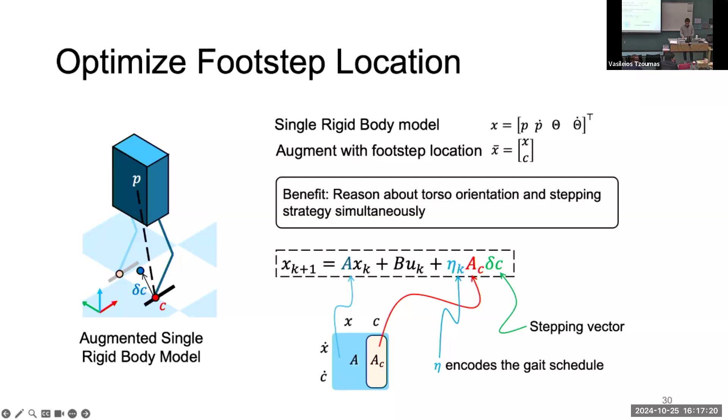I have more of a speculation question, going back to the first part of the talk. You convinced me that jumping opens a lot of new dynamic behaviors, but the thing that worries me is if you find me at a disaster scenario, you would never see me jumping, because I'd be scared that if I jump, I'm going to slip. So do you think these jumping behaviors could be reconciled with disaster scenarios where you jump somewhere and then the slope changes all of a sudden?

That's a good point. The specific motivation for this project envisions a tiny, lightweight robot that's not going to move a slab of concrete or stuff like that. It's more for going into cracks and tunnels where humans can't reach, to see whether there are survivors. In this case, using jumping motion is probably good, because the lightweight robot will be smaller in scale, so to overcome this complex terrain it has to jump in some sense.